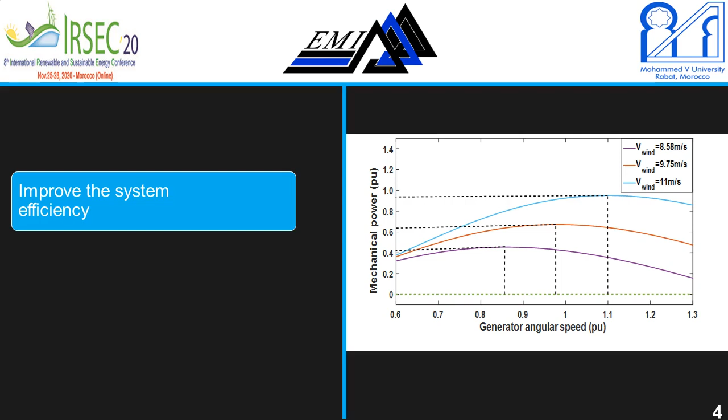In response to the rising requirement for energy, a lot of studies have been done to improve the efficiency of the wind energy conversion systems. These studies have found that for each wind velocity, there is a specific generator angular speed in which the maximum mechanical power is extracted, as it is shown in the figure in view. The specific angular speed at which the generator must rotate is calculated by the maximum power point tracking algorithm.

Hence, a suitable controller is needed to regulate the generator's angular speed depending on the reference value delivered by the MPPT algorithm. The majority of controllers need a complete knowledge of the system's electrical and mechanical parameters for good control performance. However, some degree of uncertainty always exists in the approximation of these parameters' values, whether from an inaccurate approximation or from the aging of the system's components.

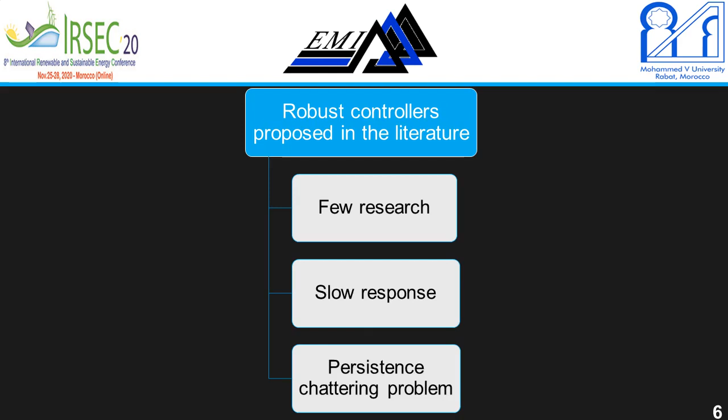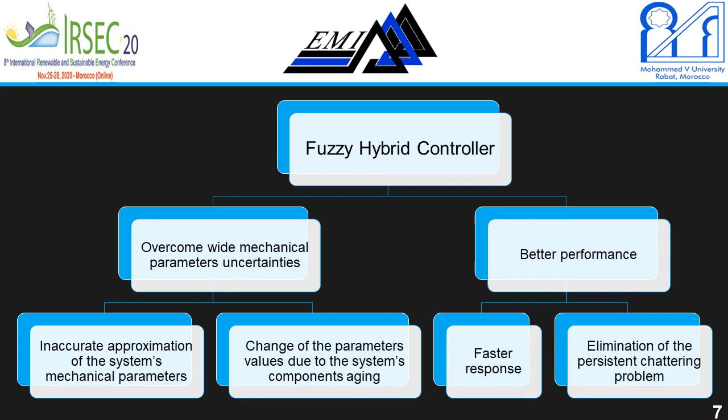Few research have been done to deal with mechanical parameters uncertainties. Moreover, some of the robust controllers proposed in the literature to overcome mechanical parameters uncertainties have slow response, and a number of these controllers suffer from a persistent chattering in the quantities controlled. For these reasons, the fuzzy hybrid controller has been designed to overcome wide mechanical parameter uncertainties with better performance in terms of time response along with the elimination of the chattering problem.

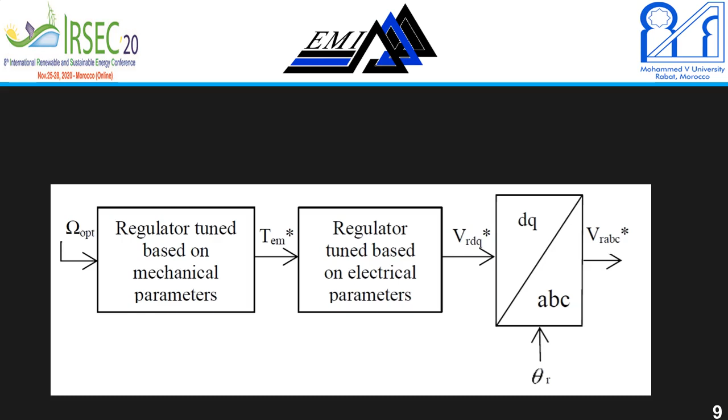The general form of a controller of a wind energy conversion system based on a doubly fed induction generator is a cascade of two subcontrollers, an external and an internal controller. As we are dealing with mechanical parameters uncertainties, the internal controller will be replaced by a PI controller, while the external controller will be replaced by a fuzzy controller that is an intuitive and robust controller, totally independent of the system's parameters. This is the complete control system.

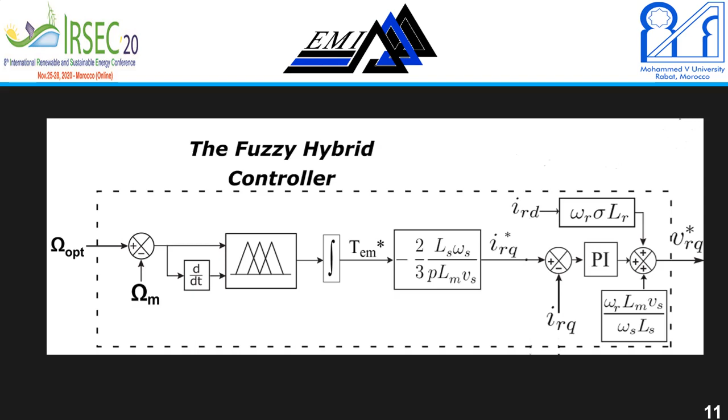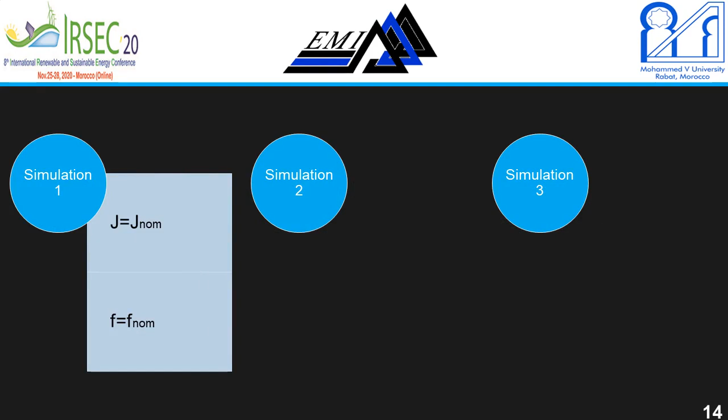Simulation of the proposed controller is made in MATLAB Simulink environment. A comparison in the performances of the fuzzy hybrid controller, the classical PI controller, and some controllers presented in the literature is done in this section. 3 simulations have been done. In the first one, the moment of inertia and the viscous friction coefficient are kept to their nominal values, while in the second one, they are increased from their nominal values by 20% and 60% respectively. And in the third one, they are decreased from their nominal values by 40% and 60% respectively.

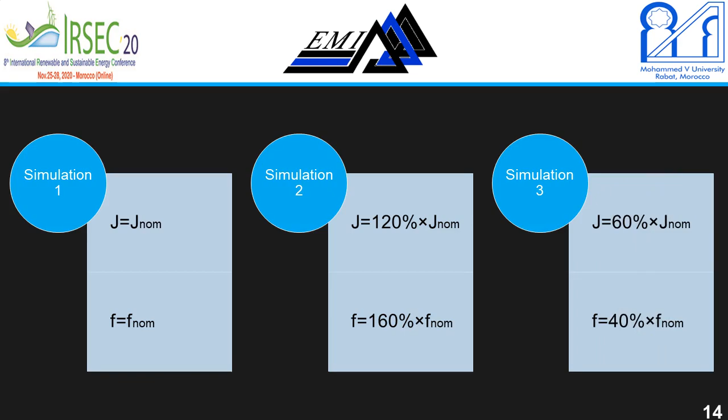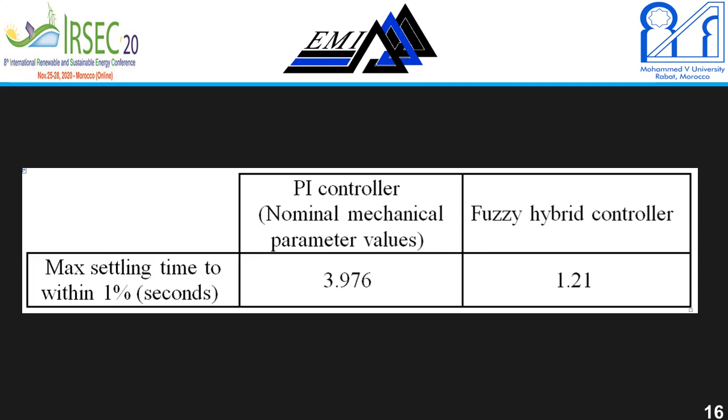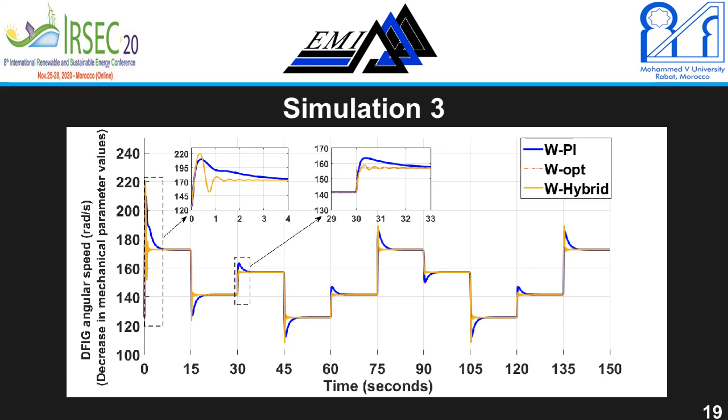The controlled angular speed in the third simulation is presented in the figure in view. As well, there is no persistent chattering in the angular speed. In the conditions of the third simulation, the proposed controller is 3.6 times faster than the PI controller.

To evaluate better the performance of the proposed controller, a comparison has been made with H infinity and Crone controllers presented in the literature. The fuzzy hybrid controller is found to be 5 times faster than the H infinity controller and 3.3 times faster than the Crone controller.

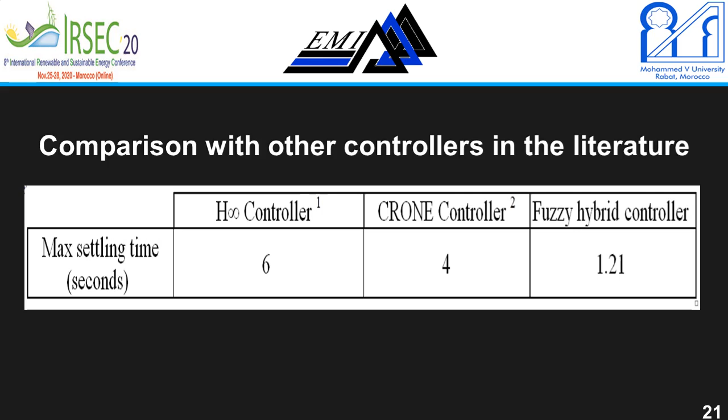To conclude, the fuzzy hybrid controller proposed is a robust controller insensitive to wide mechanical parameter uncertainties. It is characterized by its faster response and its ability to eliminate the persistent chattering from the quantity controlled.